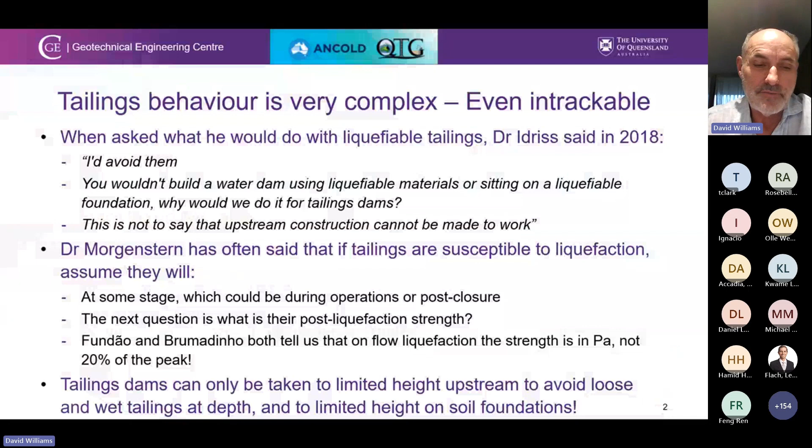Marginal stability of slurry tailings facilities. Tailings dams that fail have marginal stability. Stable dams should not fail. Perhaps 1 in 100 tailings dams have marginal stability, but of course not all of them do. Failures at El Cobre, Mount Polley, Fundão, Cadia and Brumadinho have focused our attention. The ongoing failure rate and severity is unacceptable by anyone's measure.

Let's think about what were the inferred pre-failure factors of safety for these four failures, just discounting El Cobre for a moment. For Mount Polley, it was believed that the factor of safety was 1.43 for a design that included a 2-to-1 downstream buttress slope.

The back-calculated value was about 1.1, because what they actually built was a 1.3-to-1, or angle of repose, slope, and they had, of course, a weak foundation. So it was nowhere near the 1.43 that they thought they might achieve.

Fundão had a peak drained factor of safety of somewhere between 1.6 and 2.0. You won't find that in the expert panel report—there's no mention of it. There was no undrained or post-seismic factor of safety calculated at the time. Of course, it failed, so the factor of safety was actually about 1.

Cadia, the presumed factor of safety, was greater than 1.5. That calculated around about 1.15 for the constructed geometry, and also for the weak foundation that was unknown.

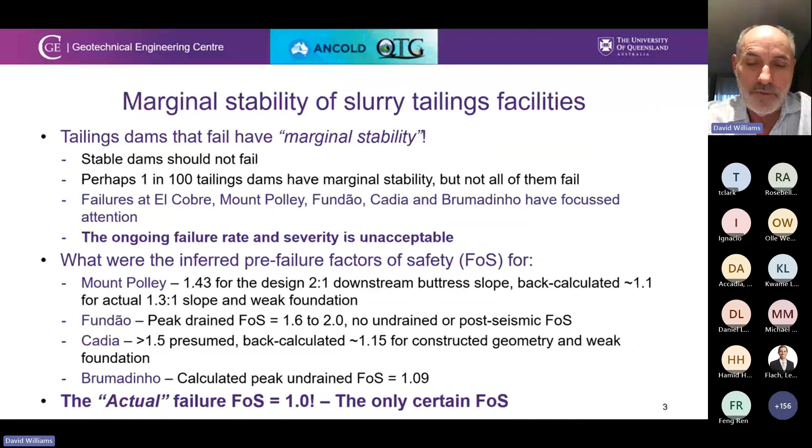Brumadinho, the calculated peak undrained factor of safety, which was required by that time after the Fundão failure, was 1.09. The actual failure factor of safety is 1. This is the only factor of safety we know with certainty—all the others are just calculated.

Let's think also about the setting of the site: the climate, the topography, the seismicity. All of these persist—they're there before the tailings dam, they're there during operations, and they persist post-closure. Think of Australia—I've highlighted in green the things that are favourable in terms of climate, topography, and seismicity, in terms of stable tailings dams. We're semi-arid, we're flat, we have low seismicity. You might say Australia is the ideal climate for a tailings dam to be constructed.

If we look to Brazil, here I've highlighted in red the things that are a little anti-stability. Brazil is generally wet, it's also steep, but it has low seismicity. Steep meaning that you can end up with quite high dams, much higher than you get in Australia.

And then, of course, Chile—arid to semi-arid, that's a positive. Steep terrain, we're in the Andes quite often, and high seismicity. So high seismicity is the key to safe design in Chile, but the fact that it's steep means you end up with high dams. So don't forget about the climate, the topography, the seismicity.

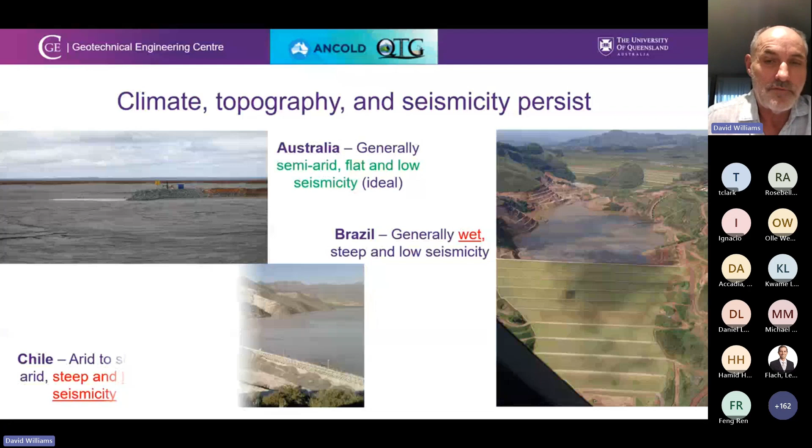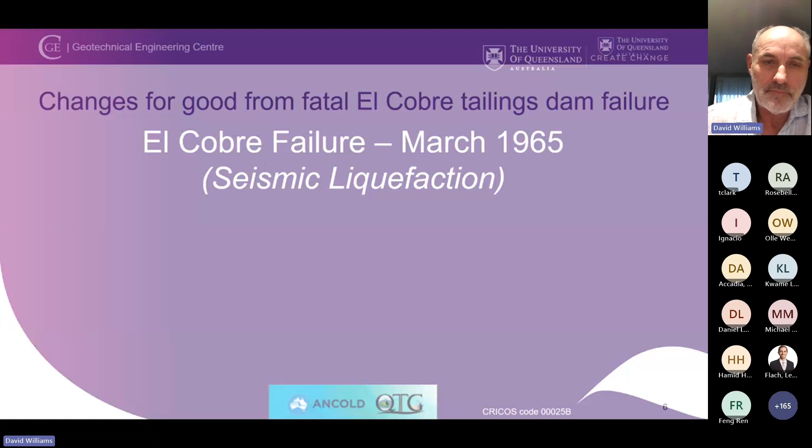Sometimes we do. Let's think of El Cobre, March 1965, a seismic liquefaction failure. There were changes for good that came out of this fatal El Cobre tailings dam failure.

If you look at it before and after, the pre-1965 El Cobre tailings dam—the black is the before, the red is the after. A couple of things you pick up: in the black, you can see there's a setback, a very common way of supposedly increasing stability by stepping back your embankment. Doesn't always actually help. The red is the post-failure shape, and notice the number of scarps—a series of progressive back scarps that go back up through the facility.

The number of fatalities, somewhere between 200 and 350. It wasn't a particularly high dam, but it went through the town of El Cobre. The reason why they don't know the precise number is they didn't know exactly how many people were there, and of course, they didn't have DNA in those days, so they couldn't accurately tell how many body parts they'd actually discovered.

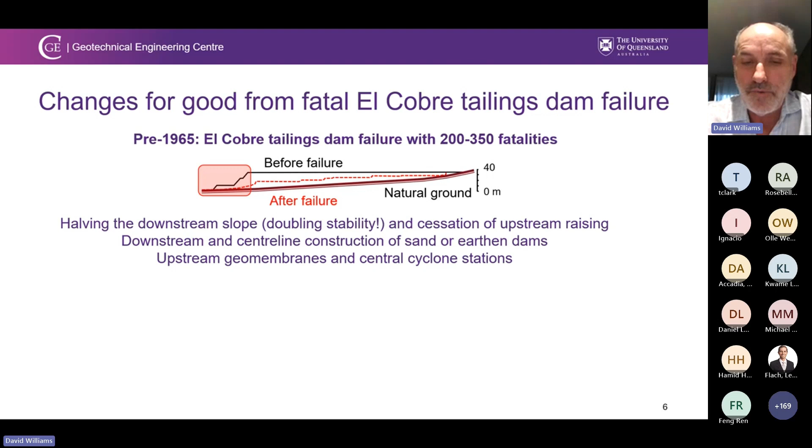The outcome of El Cobre was that the downstream slope was halved, essentially doubling stability, and they ceased upstream raising. Downstream and centerline construction of sand and earth dams persisted. Upstream geomembranes and central cyclone stations were installed. The upstream geomembrane was to try and limit the amount of water that came from the slimes into the sand dam, and the central cyclone stations meant that you had a more uniform supply of sand to build the dam.

And that's what it looked like. I've compared there the red with the green—you can see the enormity of the embankment, the stable trapezoid of support, if you like, post-1965 compared with what was done pre-1965.

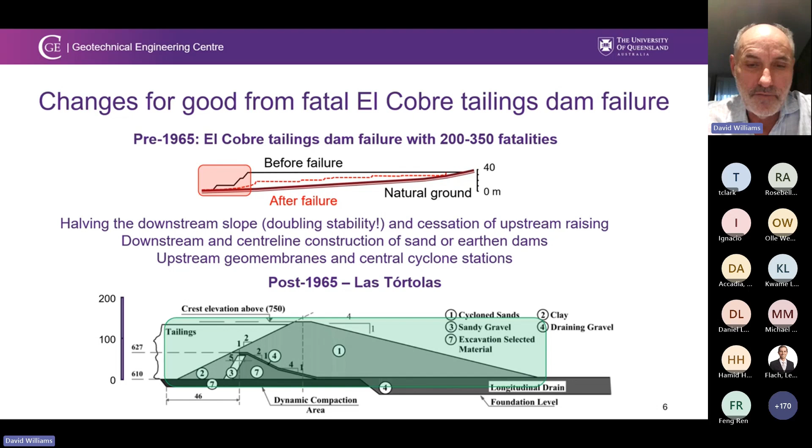It's a good story. If we look at the performance of Chilean sand tailings dams since 1965—this is after Luis Valenzuela—the total number is about 740. Active dams about 100, mostly downstream sand dams built in the way that I just described. Inactive tailings dams about 470, mostly upstream sand dams, and you've got abandoned dams about 170, also mostly upstream sand dams.

Active Chilean downstream sand dams have performed well since 1965 due to the improved construction methods, which were induced not so much by the regulators—it was induced by the industry. The regulations took another 5 years to come into effect. With the exception of a few inactive upstream sand dams in central Chile, most inactive and abandoned upstream sand dams have performed well since 1965, because, of course, they're not being used anymore and they've drained down in the dry Chilean climate.

Let's look at Mount Polley, August 2014, a foundation failure. This is what it looked like. Unfortunately, there was water and slimes against the dam at this location. Perfectly chosen, you might say, Murphy's Law. If there'd not been water and slimes against this part of the embankment that failed, you may not have had the overtopping and erosion of the dam, and the spill of the amount of tailings that came out.

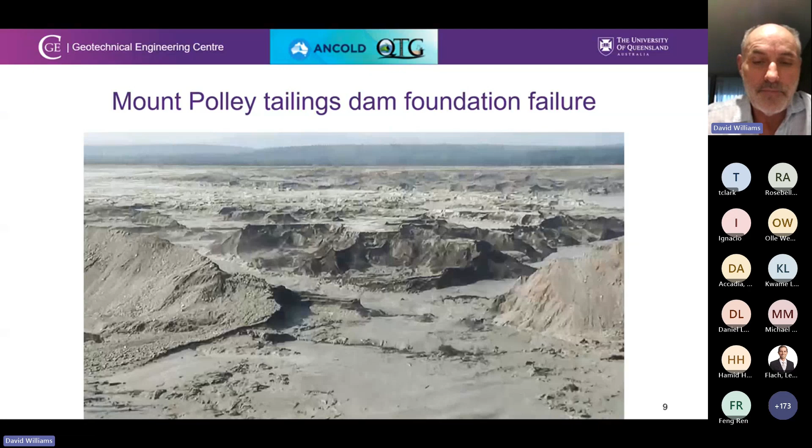Looking at the expert panel investigation and review 2015, they asked a number of questions. What was the technical cause of the failure? Essentially it was this weak foundation layer that was pre-consolidated prior to loading, but was loaded up to the point where it became normally consolidated. That would make it much less stiff, about a factor of 10 less stiff, and hence it would deform much more as the loading was increased.

The failure was triggered by the construction of a downstream rockfill zone at a 1.3 to 1 slope, when it was supposed to be 2:1. It is noted that tailings, water and slimes were against the embankment, as I said, at the location of the failure, leading to overtopping and erosion and the run out of water and tailings.

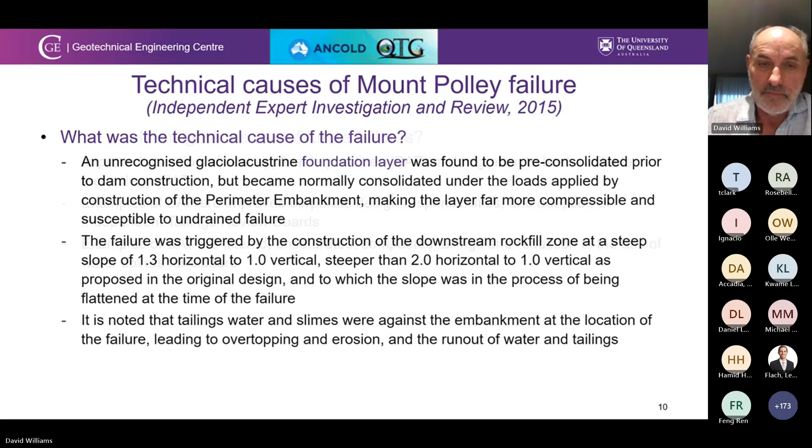They also asked what would mitigate the risk of future failures, specifically for this particular project. They said improved adoption of best applicable practices, BAP, and migration to best available technology, BAT. Examples of BAP are improved corporate design responsibilities and the adoption of independent tailings review boards. Examples of best available technology are filtered, unsaturated, compacted tailings, and reduction in the use of water covers for closure, which are quite a feature of Canada because of their wetter climate.

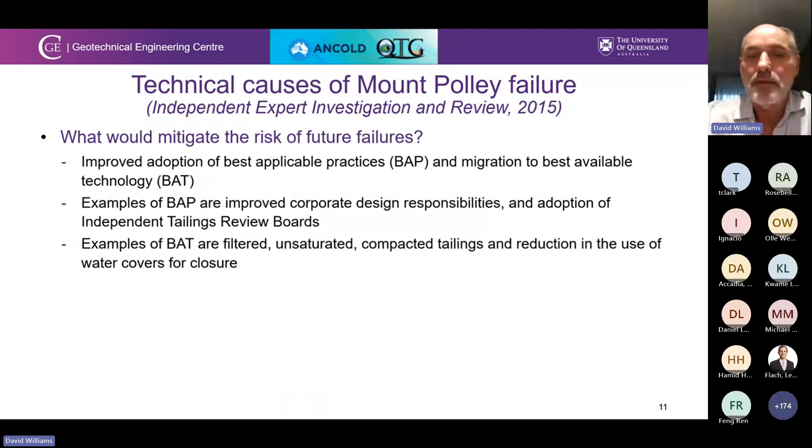Let's turn now to Fundão, November 2015, a flow liquefaction failure. It failed in seconds, it liquefied in seconds, killing 19 people. Fundão is to the right. I don't know if you can see my pointer over here. This is the Germano Dam, much more stable, which was essentially still intact. There were dikes between the two, which fortunately didn't fail, because if they had, the much larger Germano Dam may have spilled through the Fundão failure and created a much worse end result.

This is what it looked like downstream. And this progressed all the way to the coast, with suspended solids travelling about 600 kilometres all the way to the coast on the other side of the country.

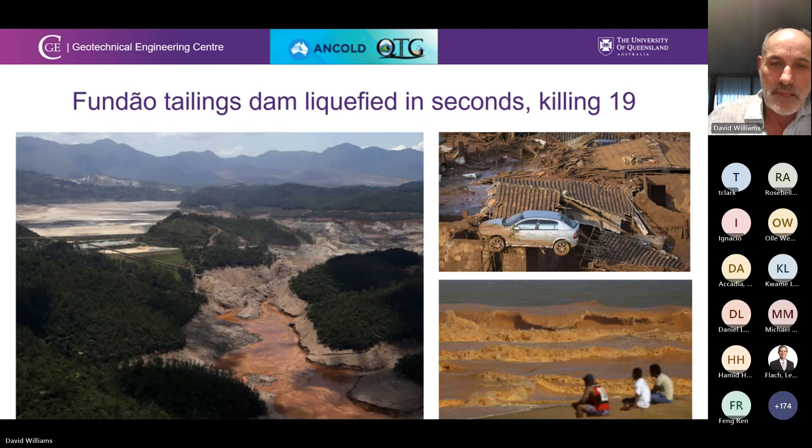Again, turning to the expert panel report in 2016, questions were asked: why did a flow liquefaction failure occur? There are a whole lot of reasons, a whole lot of things wrong with the dam, there's no doubt. Damage to the original starter dam resulted in increased saturation of the tailings, very rapid deposition of slimes, and the slimes were deposited closer to the dam than was intended. Failure of a concrete drain and the setback of the left abutment caused the dam to be raised over slimes, putting the raising further back down the beach. Compression and lateral extrusion of the slimes and loosening of the sand layers above.

Why did the flow liquefaction occur where it did? It occurred at the setback. So setbacks, in many cases, don't actually lead to stability. They may actually make stability less than it would be otherwise, because you're moving down onto slimes or finer grained materials that are softer and wetter.

Why did the flow liquefaction occur when it did? There's a bit of conjecture. If you look at the expert panel report, particularly the last paragraph in the executive summary, you'll get something like this, paraphrased a little. There was a series of 3 small, closely timed earthquakes within about 1 kilometre of the dam, about 30 minutes prior to the failure. They weren't big enough to cause liquefaction in themselves, but being closely spaced they would have some sort of cumulative effect.

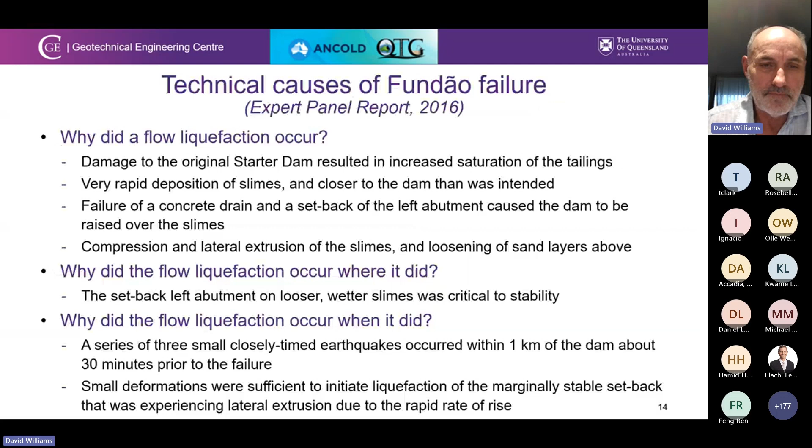So one of the resulting changes to tailings dam design in Brazil's wet climate arising out of Fundão: if you look at prior to Fundão, Brazilian law required only drained geotechnical stability. They actually call it effective stress analysis. It's a very short paragraph in the law. It's not a how-to guide. It just tells you, you must do this.

The drained internal friction angle can generally be relied upon and only varies by a small amount, possibly plus or minus 3 degrees, provided it doesn't go to residual strength. Drained geotechnical stability is generally not critical. Undrained or seismic geotech stability likely governs, as was the case for Fundão.

So arising out of Fundão, by 2017 the Brazilian law was changed, and it now requires undrained, drained, and post-seismic analyses. But it raises some questions: what are reliable and representative peak and post-seismic undrained strengths? In Brazil, they weren't used to coming up with these, and they've struggled.

Undrained strengths also vary more widely than drained strengths, implying less certainty about the calculated factor of safety. So if your undrained strength varies by, say, plus or minus 30%, depending on which consultant you ask, your factor of safety will also vary by that amount.

In the Latin-speaking world, as opposed to the English-speaking world, simplistic pseudostatic stability is analysed. If any factor of safety values are less than required, I would say, and most people would say, do a deformation analysis to check freeboard and how much movement you might get.

Turning now to Cadia, March 2018. Again, a foundation failure. Prior to the failure, there was a pond at the toe where the slump location occurred. Well prior to the failure, there was only the northern tailings storage facility—the southern one, in the bottom half of this picture, had not been built at that stage—but there was a pond, a low point right against the toe where the failure subsequently occurred.

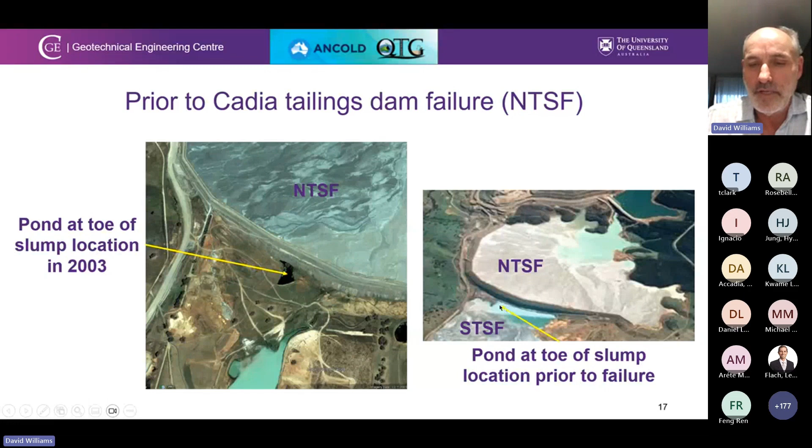Now the pond—there was a pond there from natural sources. There was also a pond from the tailings that came from the Southern Tailings Storage Facility, right in the same location, at the maximum height of the Northern Tailings Storage Facility.

Again, turning to the expert report, technical causes of the Cadia failure: why did the event occur? It's interesting they called the failure an event rather than a failure. Deformation in the foundation during construction of the upstream stage 10 and the upper buttress, and excavation at the toe, led to the removal of embankment support at the toe and later liquefaction of the loose saturated tailings behind the embankment. So liquefaction was a secondary event, about a day later.

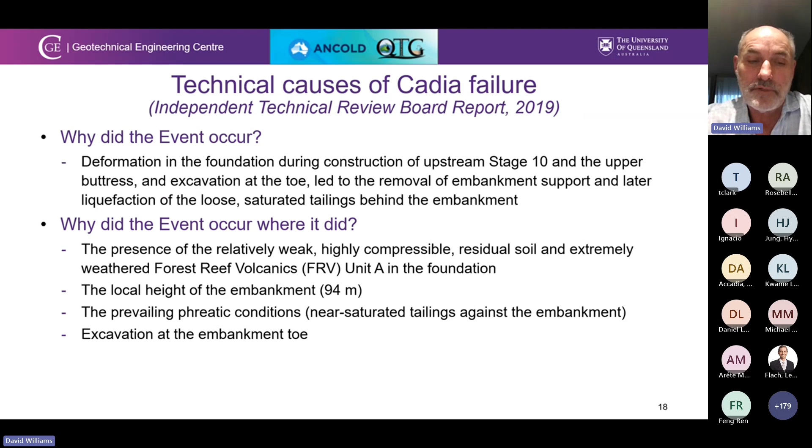Why did the event occur when and where it did? Again, there was a weak, highly compressible layer that was previously unknown. The local height of the embankment at that point was 94 metres. The prevailing phreatic conditions, near-saturated tailings against the embankment, also contributed, and there was excavation at the embankment toe.

Why did the event occur when it did? Timing was controlled by deformations accumulated through the construction history. So essentially it was a construction-driven failure, sufficient to trigger foundation failure and later flow liquefaction in the loose, near-saturated tailings stored in the Northern Tailings Storage Facility. There was a small earthquake, or a series of small earthquakes, prior to the event, but they were ruled to have no effect on the failure.

They also asked the question, why won't a similar event occur? A similar failure can be avoided by adequate analysis of the foundation conditions—well, investigation first, then analysis—and appropriate instrumentation to demonstrate that the foundation is behaving as intended.

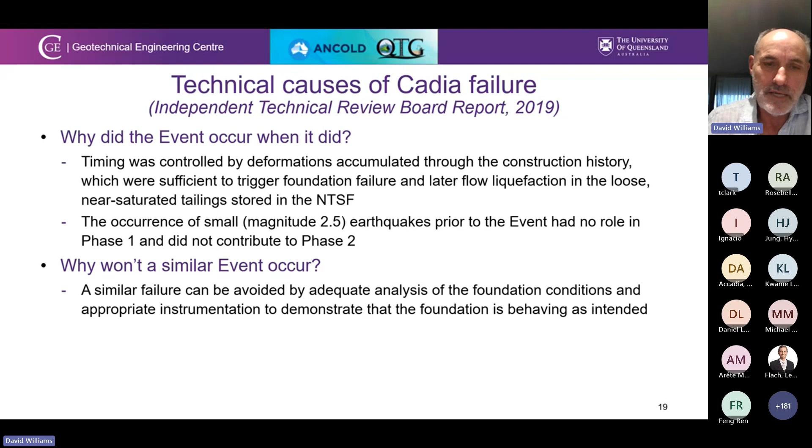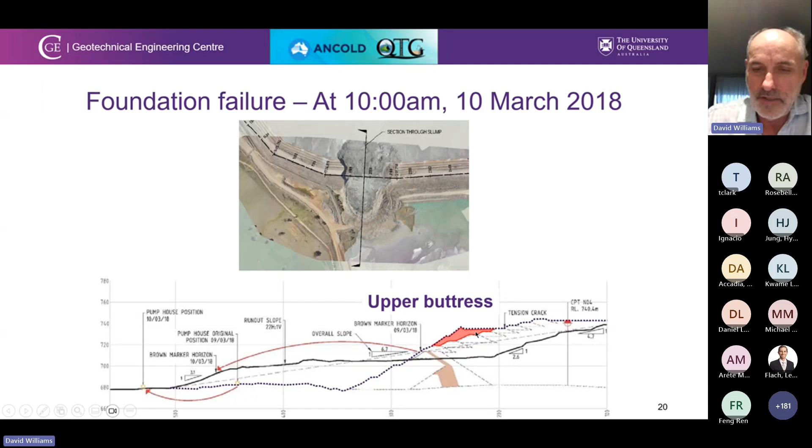Now, looking at the failure, it was a relatively small-sized failure. You can see an aerial view of it there. And then in the lower diagram you can see the location of—well, first of all, stage 10 was back here. There was a tension crack that developed here. The so-called upper buttress was placed here.

Just giving a bit more detail of that, you can see stage 10 up in the top right-hand corner. It was constructed, then the upper buttress. The intention was to add the two downstream buttresses, the toe and this face buttress as well, but they weren't done at the time, and there was excavation at the toe instead.

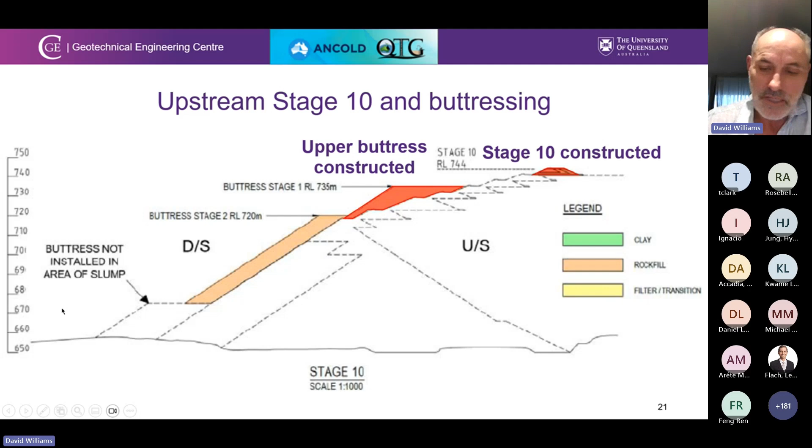So you've now got loading at the crest and unloading at the base. Most people would realize that was a bit of a recipe for disaster. And because it was known by that point, I guess, that they'd found weak foundation conditions.

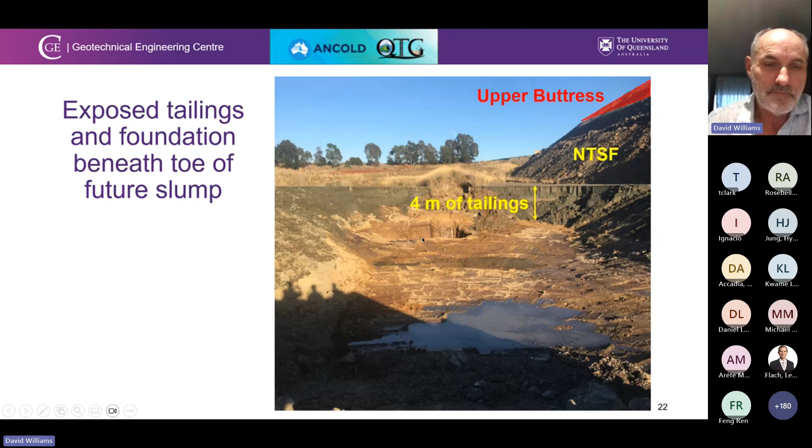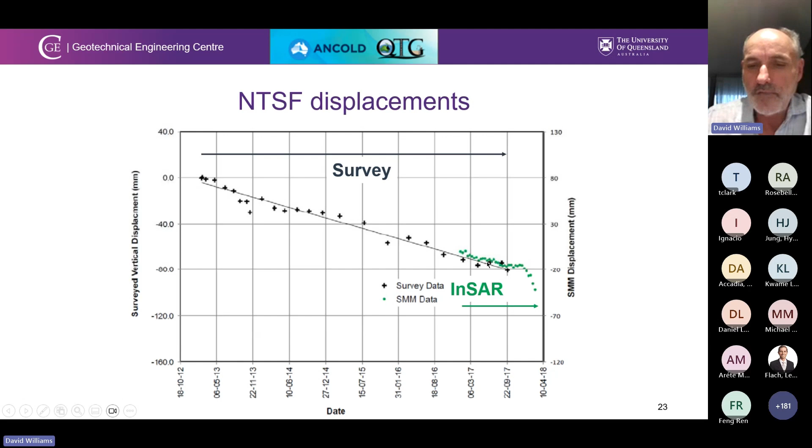It wasn't known prior to the excavation. Some useful information came from satellite INSAR. There was displacement monitoring just from prisms. If you look at the crosses, you can see that they're anywhere up to about 5 months apart, so certainly not particularly frequent, but that was fairly common at the time. So that's survey. And then INSAR, which was calculated after the event using satellite imagery, is the green dots, and the failure occurred about there.

So you can see that this was compared with a flow liquefaction failure, this was a relatively slowly developing failure, because, of course, INSAR only gives you a point every 5 days or so if you've got ascending and descending, or even more infrequently, about 11 days if you've got only descending from north to south.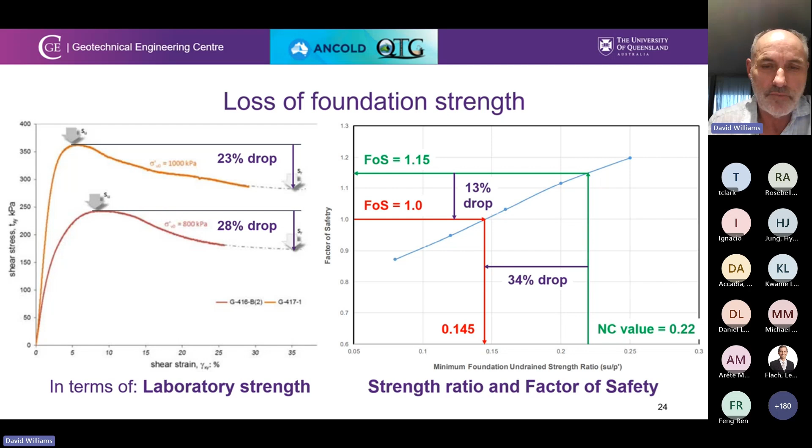So that's a 34% drop. If you do it in terms of factor of safety, it's a 13% drop. You can see there's quite a considerable drop just based on those two simple analyses of laboratory strength and strength ratio versus factor of safety. Gives you a bit of a feel for when the deformation exceeds a certain point, how much drop in strength, drop in stability you might get.

Now turning to Brumadinho, January 2019. Another flow liquefaction. So we've got two foundation failures, Mount Polley and Cadia. We've got two flow liquefaction failures, both in Brazil. That is Fundão and Brumadinho.

Most people by now will have seen the little video clip, and this is just a shot taken some seconds after this tailings dam liquefied, killing 270 people. We can be much more precise about the number because we had the advantage of DNA testing. You don't find whole bodies. Unfortunately, you find body parts, and you need DNA to identify them. The dam was about 80 meters high. The wave that came out was at least 30 meters high.

Again, turning to the expert panel report, Dam 1 was marginally stable, basically too steep, too wet. A sudden strength loss and resulting failure of this marginally stable dam was due to a critical combination of ongoing internal strains, or creep, and a strength reduction due to the loss of suction in the unsaturated zone as it wet up with rainfall. The rainfall we're talking about was not the highest on record, but the preceding 6 years up to this point, the rainfall was progressively increasing each year.

So this particular year was quite a high rainfall event. It wasn't the wettest, but it was quite high, much higher than previous years. The calculated pre-failure strains from this combination of triggers match well the small deformations of Dam 1 in the year prior to the failure. Of course, it took off and failed very dramatically when it did fail.

It's also interesting that limit equilibrium analyses assume all points on the slip surface to be at the same state. This is not necessarily true for a marginally stable dam. It's clearly not true in this case, where different parts of the tailings mass are at different states on the stress strain plot.

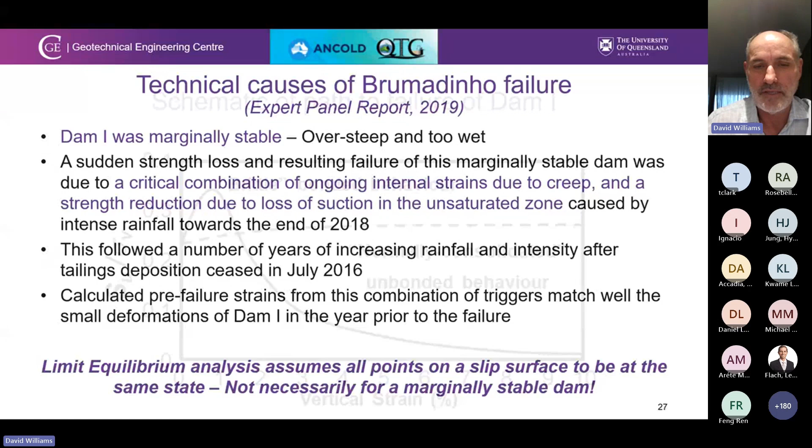Some are pre-peak, some are at peak, some are post-peak, and the drop-off in strength after peak is very dramatic in this particular case. So a schematic of the path to failure of Dam 1 looks something like this: undrained strength ratio versus vertical strain.

The tailings material had a very brittle behavior. At about 1% strain, they collapsed. Normally consolidated would be more like the dotted line.

So essentially you had this combination of strength reduction due to loss of suction in the unsaturated zone, where most of the rainfall infiltration was taken up and didn't get through to the water table, and ongoing creep under constant load. This was constant load because the dam had ceased tailings deposition.

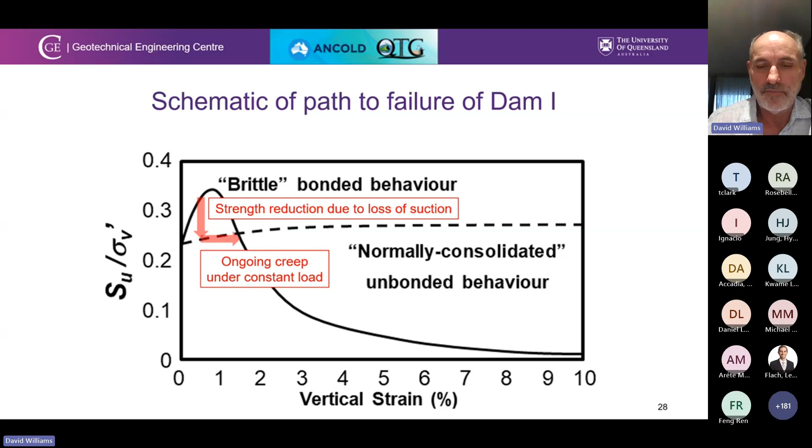And I could put those two vectors anywhere. I could have put them down here and had loss of strength and creep. It would have had the same sort of effect, a reduction in strength, leading to that sudden flow liquefaction failure.

So that led to the global industry standard on tailings management. Its aspirational goal is zero harm to people and the environment. And of course, we must realize that zero harm is impossible, so it's an aspirational goal.

The design intent is to have extreme consequence classification and a 1 in 10,000 year return period for both flood and earthquake loadings. That design intent matches exactly what we have under ANCOLD and CDA, but for closure. So essentially it's trying to bring that requirement to the operational phase.

The trouble is the current operational practice is typically maybe 1 in 100 or 1 in 1,000 year return periods, not 1 in 10,000 years.

So the implications are that we should really design for the probable maximum flood. We should design for the maximum credible earthquake, and it doesn't matter where you are in the world, that's likely to be sufficient to liquefy susceptible materials.

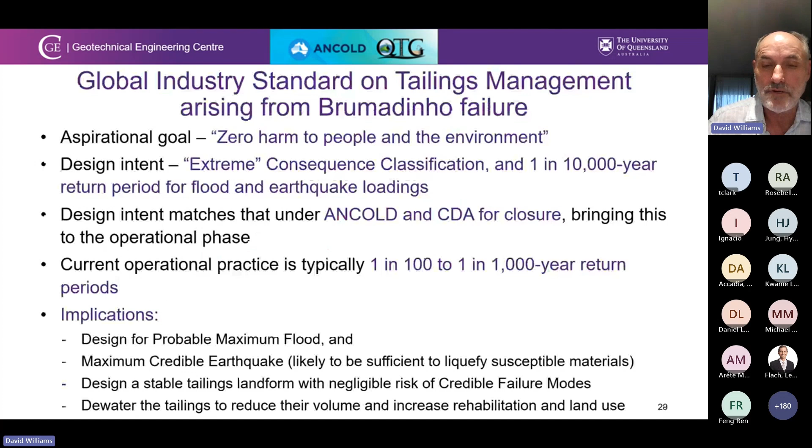So how has the industry responded? The late Andy Robertson, in 2018 in Brisbane, said that in the wake of recent tailings dam failures, improved management resilience—that is, governance—is leading over improved engineering resilience. If we had the latter, we'd actually be reducing the liability.

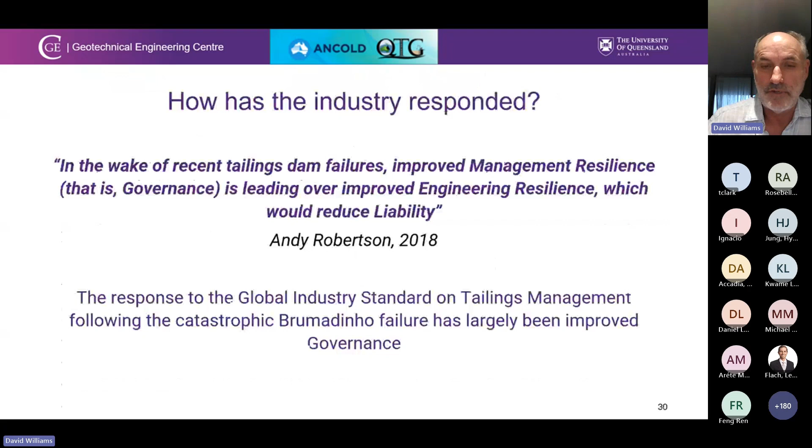So governance alone can't do that. And then further, the response to the global industry standard on tailings management, following the catastrophic Brumadinho failure, has largely been improved governance. How much have we actually changed the way we manage tailings?

I think the plot by Silva is a very pertinent one because it highlights the disconnect between factor of safety and probability of failure. So if you choose a factor of safety of 1.5, but you have poor design and construction, you've got a 1 in 10 chance of failure on an annual basis. In other words, out of 10 dams, 1 will fail.

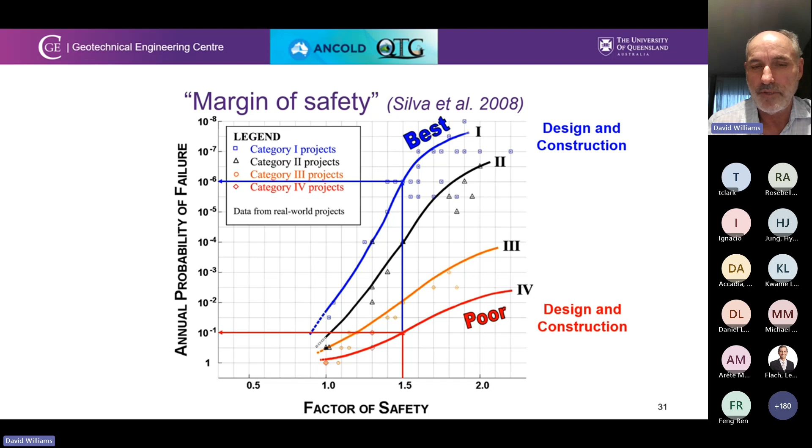Clearly, we're not there because we don't get that failure rate. We can adopt the same factor of safety, but have best practice design and construction, and reduce that probability to 1 in a million. Clearly, that's where we need to be.

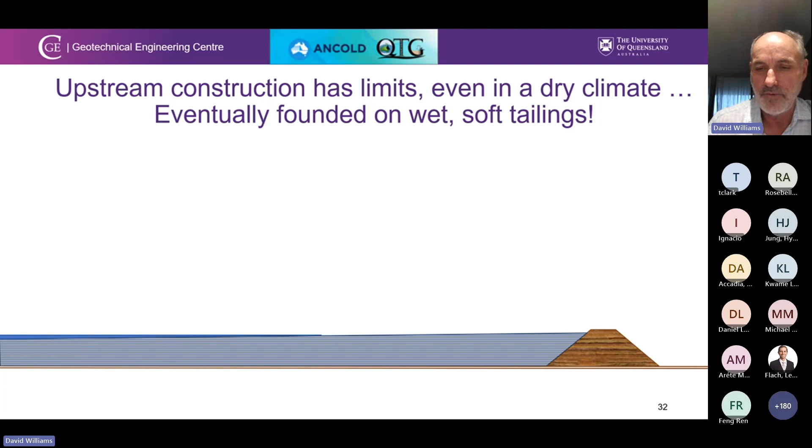If we look at upstream construction, it has limits even in a dry climate, because eventually you'll be founding on wet, soft tailings. If we look at this cartoon, there's a starter dam. We put in tailings behind it, we have a pond, we raise it upstream, tailings in a pond, and so on.

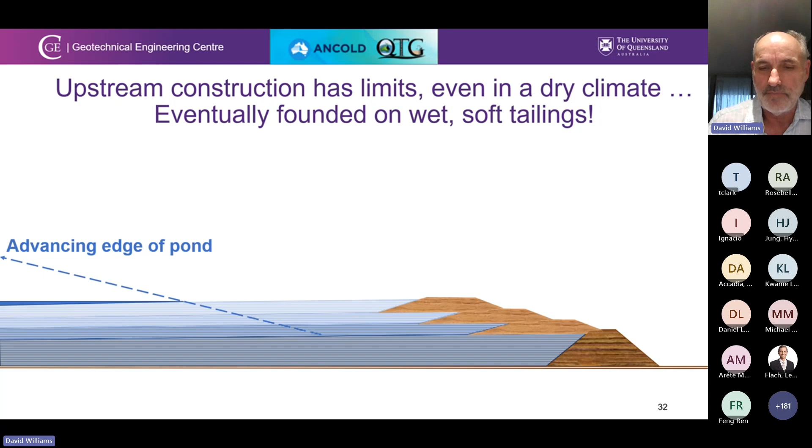So what we have is an advancing edge of the pond. But if we keep going, then it's clear that that advancing downstream crest is going to be at some stage sitting on top of a former pond. In other words, wet and soft tailings.

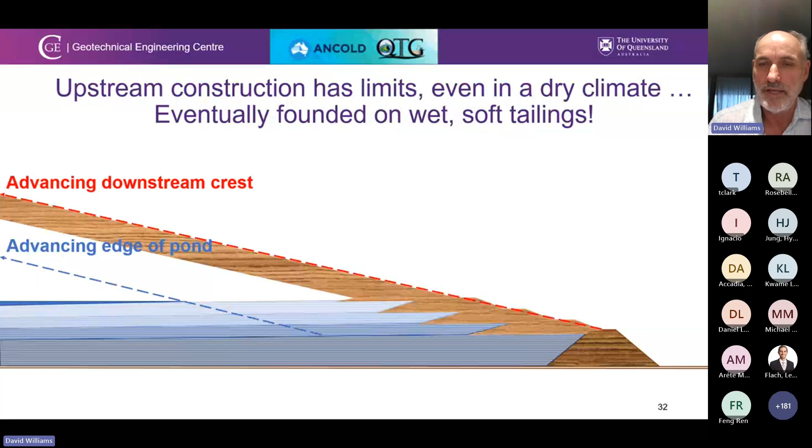What about construction on weak foundation layers? It has limits as well. As the height of the tailings dam is progressively raised, the pre-consolidation pressure—the highest historical stress of foundation layers, we're talking about soil layers—may eventually be exceeded.

So the foundation layer then reverts from over-consolidated to normally consolidated. Its stiffness is about a factor of 10 lower, and you're going to get much more, 10 times the deformation for an increase in load. And such deformations can threaten freeboard, potentially leading to overtopping and failure.

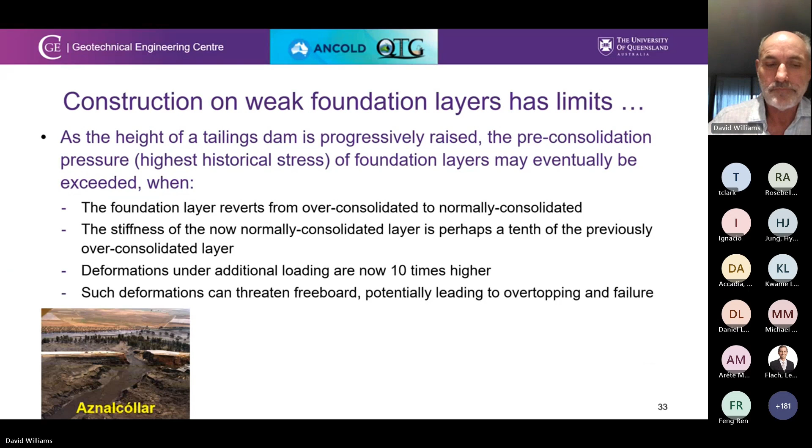Examples: Aznalcóllar, Mount Polley, and Cadia.

There's some sort of evolution of tailings dam construction. We started with a trapezoidal downstream tailings dam, raised by a series of raises downstream. We moved to upstream construction.

But we're essentially relying substantially on a tailing zone. What we've really created is something like a skin on the upstream face, but the tailings behind have to provide support.

Now, in regions where upstream construction is being banned or it's unachievable, we want to go back to a conventional tailings dam. We need a trapezoidal downstream tailings dam, or at least maybe a centerline dam you could get away with as well. And then there's a lot of talk about moving towards a filtered tailing stack.

We have to stop calling it a dry stack because it's not. It's filtered tailings that to some extent are being compacted as well. And if we have a structural compacted zone, we're still relying on a substantial non-structural zone. If you compare the top right-hand corner with the bottom left-hand corner, it looks somewhat similar.

So in regions where upstream construction has been banned, you wonder how long it's going to take before we ban this sort of filtered tailing stack.

You could also consider in-pit disposal where appropriate and suitable, but preferably dewatering the tailings to maximise the storage capacity and to facilitate rehabilitation. How would we make a filtered tailing stack more stable?

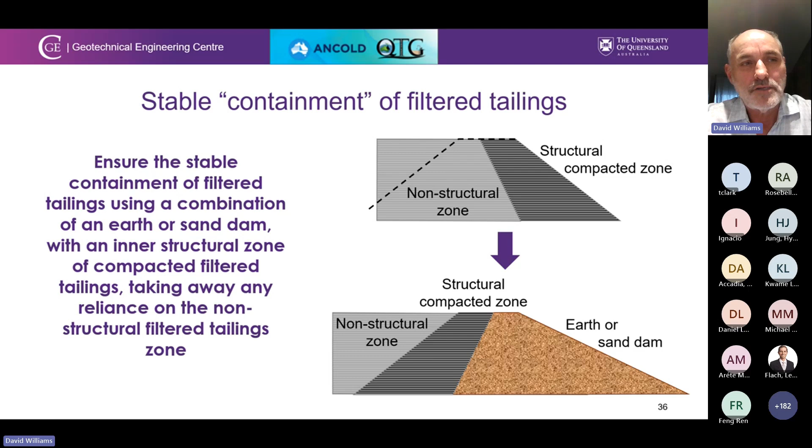So going from the top to the bottom. Now, in fact, in Brazil now, they're required by law where they use filtered tailings to compact the entire stack, not just an outer zone.

Let's think about what a tailings facility might look like. Typically in Australian conditions, you have a starter dam, you go to a downstream raise, then you decide, oh, there's too much fill involved in going downstream again, so we'll go upstream.

Now we're worried about upstream failure, so we put in a bit of a berm, which is not a very efficient way of stopping upstream failure. We go one more with a bigger berm and a longer berm. But how do we make that close?

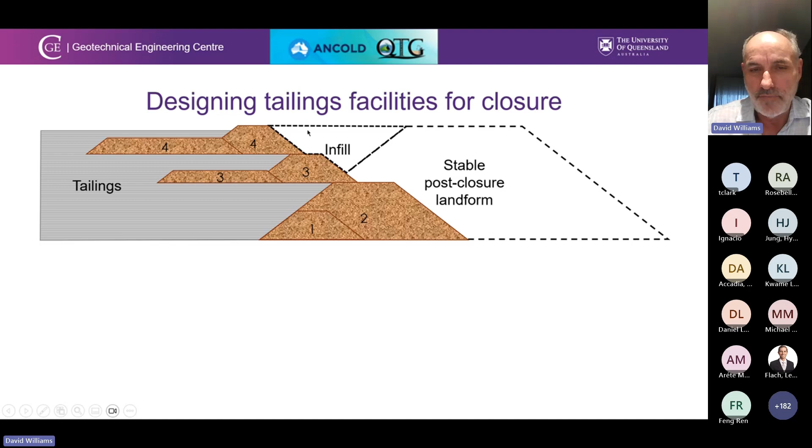Well, to close, we need a stable post-closure landform. If we built that, we'd then have a zone here to infill. And the total amount of fill we'd have used to create this stable post-closure landform is now more than if we just did this in the first place.

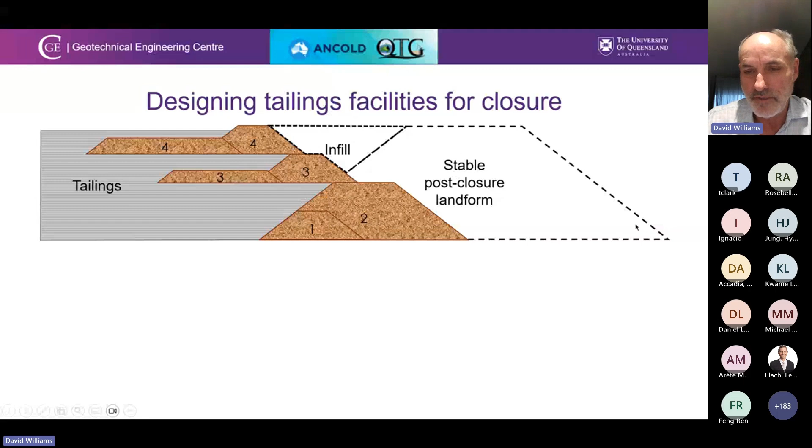Just build a stable trapezoid in the first place. Something like this.

So some key takeaways. Tailings dams that fail are marginally stable, and there is typically a combination of causes, and obviously water is the key element. If the tailings were dry, you wouldn't have a stability problem.

Fatal tailings dam failures can bring real change. El Cobre revolutionized tailings dam construction in Chile's highly seismic setting and also spread to Peru.

Brumadinho led to the GISTM with the ambition of zero harm from tailings facilities, affording operators flexibility as to how best to achieve this goal. However, the GISTM has led primarily to a focus on governance rather than changing tailings management.

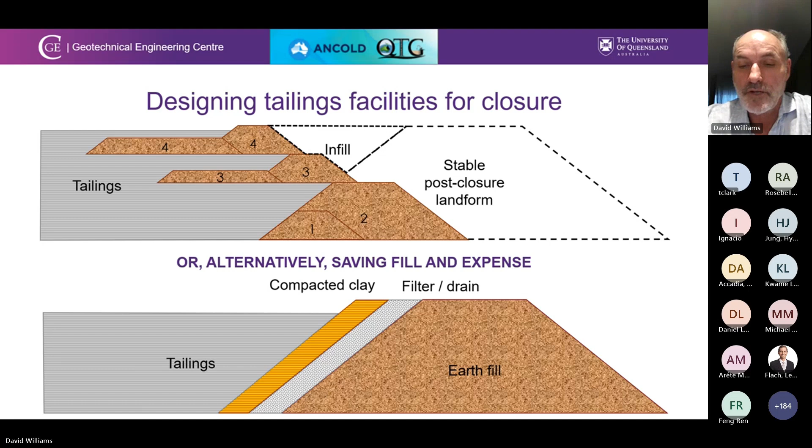Alternatives include compacted filtered tailings and integrated waste rock dumps, tailings facilities. Separate tailings containment from storage, and then have optimal storage. Separate tailings containment and optimal storage. Will we improve tailings management sufficiently to recover confidence and trust? Over to questions.

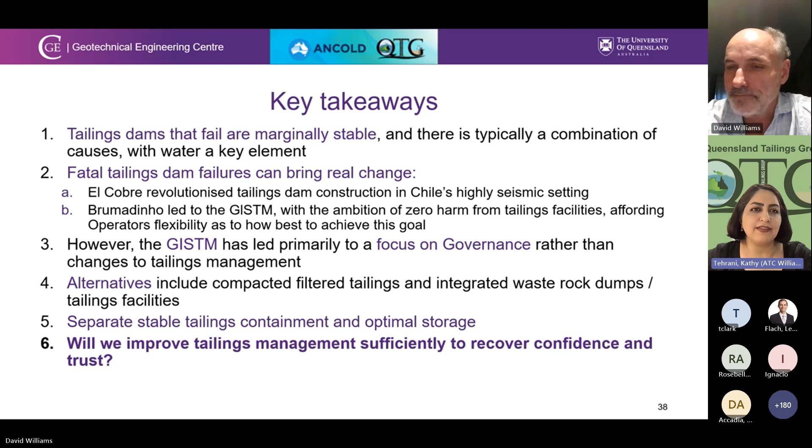At what stage would you move from limit equilibrium modeling to deformation modeling? Is limit equilibrium on its own sufficient if you are achieving certain factors of safety, like 1.5 for peak and 1.1 for residual shear strengths?

Yeah, I think it's unfortunate that we've become so fixated with the factor of safety approach. It's a simplistic approach which is poorly understood - what does it really mean? It has the attractive word 'safety' in it. Probability of failure has the unattractive word 'failure' in it. But it doesn't matter what the factor of safety is, every structure has a probability of failure, even though it may be very small. It doesn't go away just because the factor of safety is above a certain level. So I think we should be using the factor of safety calculation, which is rather simplistic when you boil it down, as a screening test.

ANCOLD, CDA and other regulations around the world are all saying that ideally you have a factor of safety in excess of 1.5 for the peak condition. There's a bit of disagreement about the seismic value - in ANCOLD it's between 1.0 and 1.2, which is quite a range. We don't give a range for peak, so why do we give a range for seismic? There's a rider that allows you to make a judgment on whether your data are good or bad. In CDA, it's more like 1.1 to 1.3, still a range. Some mining companies have adopted 1.3. I think we should have a little more uniformity on that.

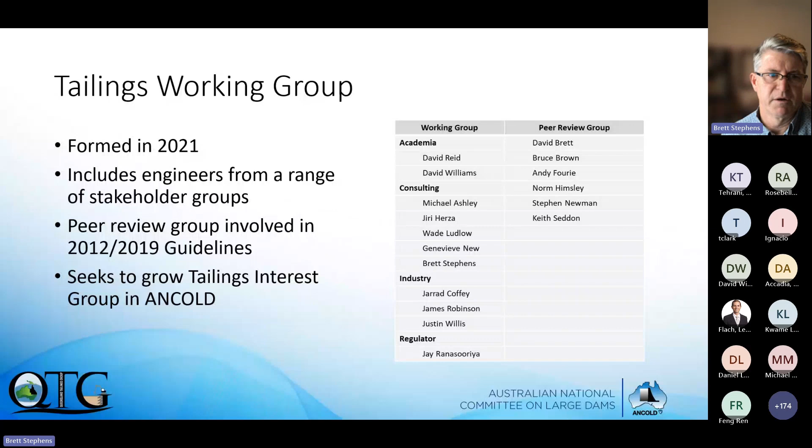A bit of a shout out to the Tailings Working Group — that's the group involved. That includes David, as well as a suite of other people from academia, consulting, industry, and regulators. We're fortunate to have a very distinguished peer review group who were responsible for writing the last tranche of the guidelines, which have been very well received and used by industry.

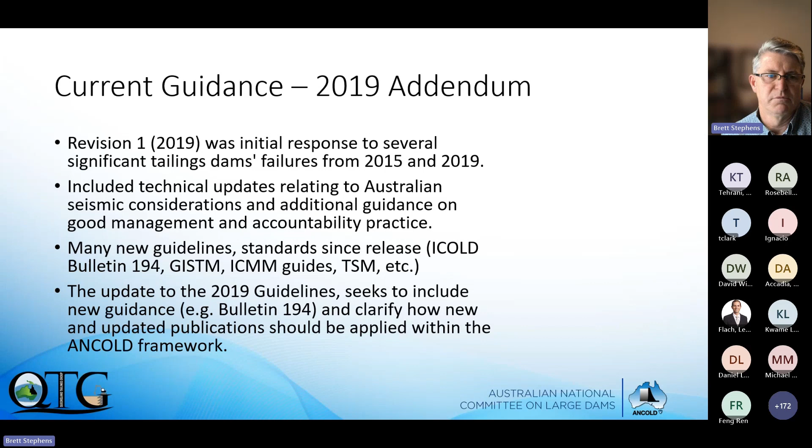Just a bit of a brief outline on the guidance. The last update to the ANCOLD Tailings Guidance was in 2019, and it was really an initial response to the dam failures that David discussed, including a technical update on Australian seismicity. Since then, there's been a suite of new guidance and standards released — ICOLD Bulletin 194 is out in draft on tailings management, awaiting printing. We've also got GISTM, a governance guideline, and the ICMM guides, TSM, among others. So our update wants to include all this new guidance and clarify how all these new publications would be applied within the ANCOLD framework.

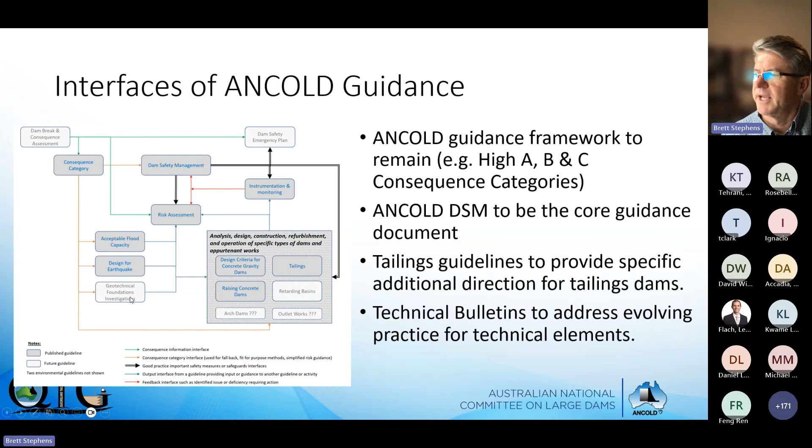We've been asked a bunch of times as a group, are we adopting the GISTM guidance? Are we changing the way we do consequence categories? And the answer is basically no, because we're anchoring to the ANCOLD guidance and the work that the consequence categories are based on. So we're not going to be changing consequence categories to align with GISTM. That doesn't make sense for us.

We're wanting to link into those guidance, but using the updated and current guidance of ANCOLD doesn't conflict with GISTM, and I think the industry is used to dealing with that. We have our ANCOLD consequence category, and then we obviously have the GISTM consequence categories. I think the dual reporting of that is not confusing anyone at the moment - it's been understood by people who are applying GISTM guidance.

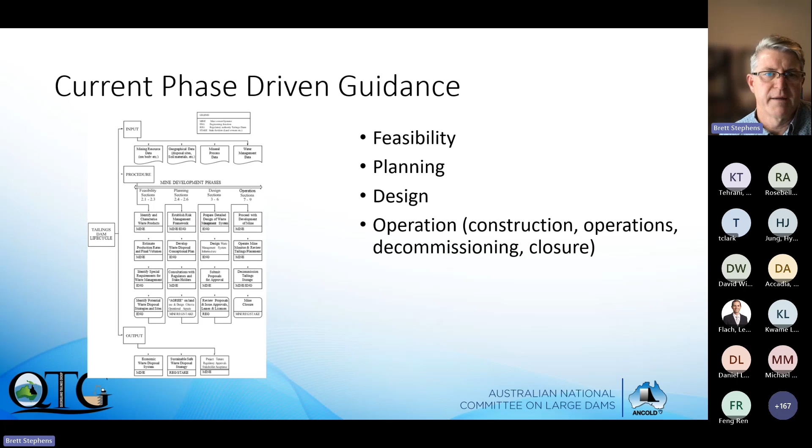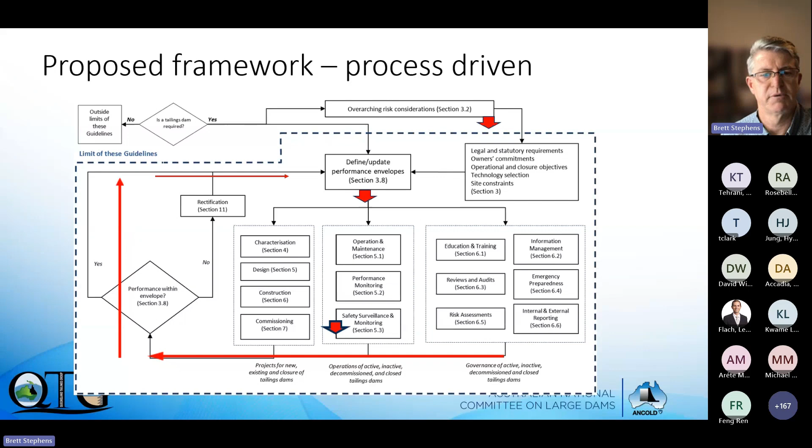So I can take some questions on that, because I expect we'll get some based on the feedback we had from the WA Tailings Group two weeks ago.

So I heard the question to David, and you'll probably get it to me again. In these guidelines, we're really talking to the term tailings dam referring to a constructed structure or embankment to contain tailings. So we're really looking at what those dam structures are, and we're not specifically going to provide detailed guidance on things like in-pit storage, filter stacks, and integrated tailings and mine waste dumps. So our intent and our thoughts are at the moment that we'll provide some commentary in the back of the guidance on how some of the guidance for tailings dams may be applied in certain situations for things like filter stacks and integrated tailings and mine waste dumps.

But they're not going to be exhaustive, and they're going to be guidance only, and we'll be trying to direct people to make their own judgments based on the standards, because these standards are really not applicable for in-pit storages directly. You're going to need to use engineering judgment, and they're probably going to be out of scope for most of the things.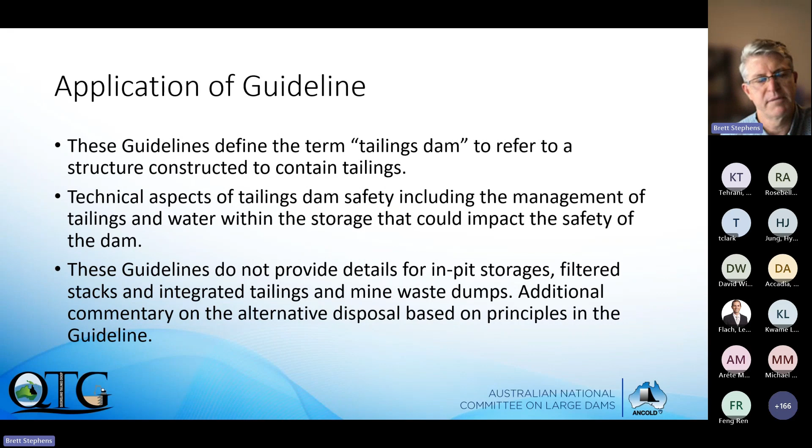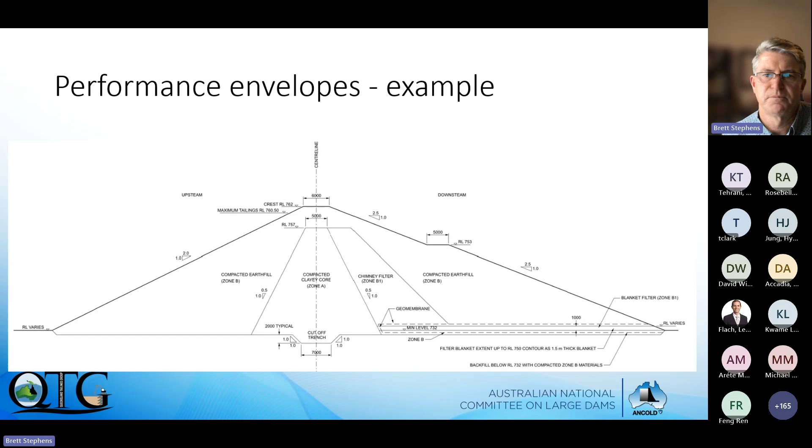So as an example, and apologies to people in WA who saw this before, but we're just repeating it. It's our post-construction. We've got a dam. We expect post-construction settlement of this dam to be 600 millimeters. So the design includes a camber to compensate for the settlement of the foundation. So that's our expected performance. So the storage and the flood handling of this dam is based on this expected performance of 600 mils, and our freeboard's being built into it there, along with the storage of the tailings. So all of that forms our expected performance envelope.

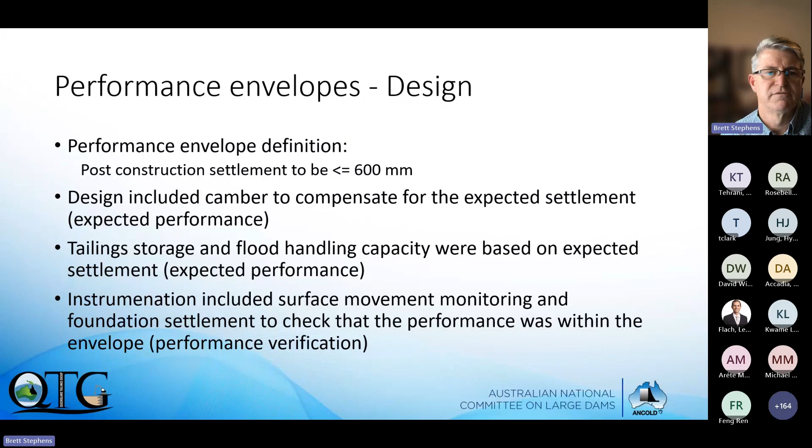We've put instrumentation on the surface to monitor this as part of checking and doing that. And that's what we've done as part of the performance verification. So there we have, here's our performance envelope. We've defined our performance, and we have our characterization, our design, and our construction for doing the verification. So not very complicated. We do this all the time. It's just a different way of saying it.

So as with all things with tailings, we plan, do, check, act. So we've built this thing, and we've now gone and looked at our instrumentation. The dam settled more than 600 mils. So we've gone back and checked it all. And what we find out is this additional settlement now compromises our flood handling capacity. Our freeboard's no longer what we had in our design envelope. So what do we do?

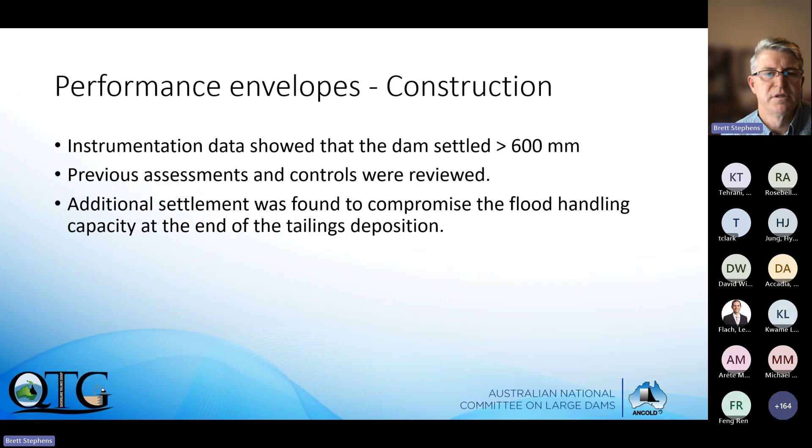So now we've got our performance monitoring, we have our surveillance and monitoring. Is it within our envelope? Clearly it's not. So we now go to what we call rectification. So we're going to have to repair the dam. Now that doesn't mean we're going to repair the dam every time. What we want to be doing is going back and looking at the crest. So potential options for this dam, because it's a very simple example, let's just change the dam. Let's build the crest up for the differential between it.

So we've got 800 mils of settlement. We had 600. So can we top this up 200 millimeters, or can we change the performance envelope and reduce the tailing storage? Right, these are all of the options that are always available to us as designers, and it's pretty simple, as you can see.

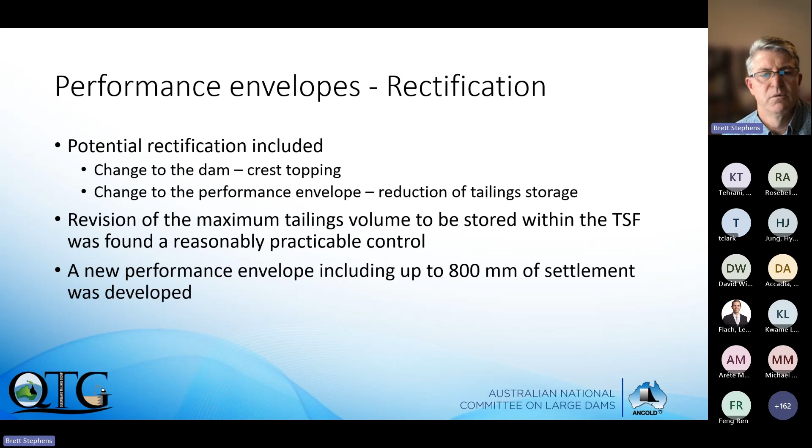So really, what we said is that we can revise the tailings to be stored in it. We think that was the answer we suggested out of the two, because we can't get out there due to piping and discharge and the thickness of the thing. So the new performance envelope's 800 mils of settlement, and what we've done is we've reduced ostensibly the volume of tailings stored by 200 mils. So therefore, we've done this rectification.

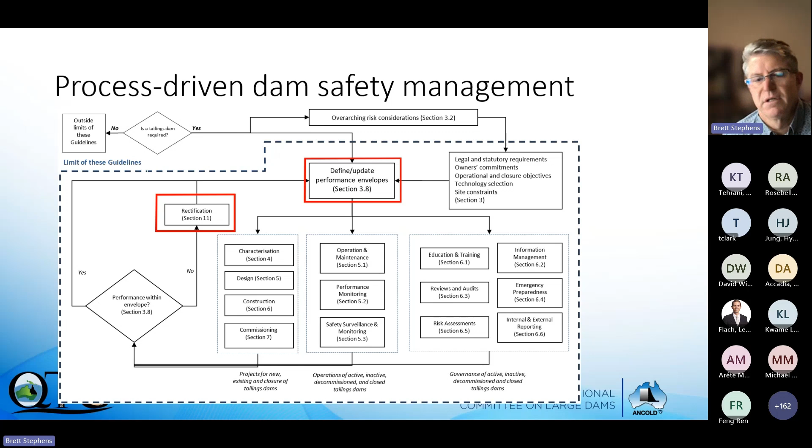We've changed this performance envelope, and then we go back into this cycle to check, right? So this is really nothing new. It's just some different terminology, and that's where we work.

So now our performance envelope is now 800 mils, 200 mils higher than it was. We didn't do the raise. We've got the same freeboard because we've reduced the tailing storage, and then we're looking to increase monitoring because basically this additional settlement wasn't foreseen. So do we have unfavorable cracking? Review the instrumentation in light of that, and then check the changes don't influence other performance envelope criteria, right?

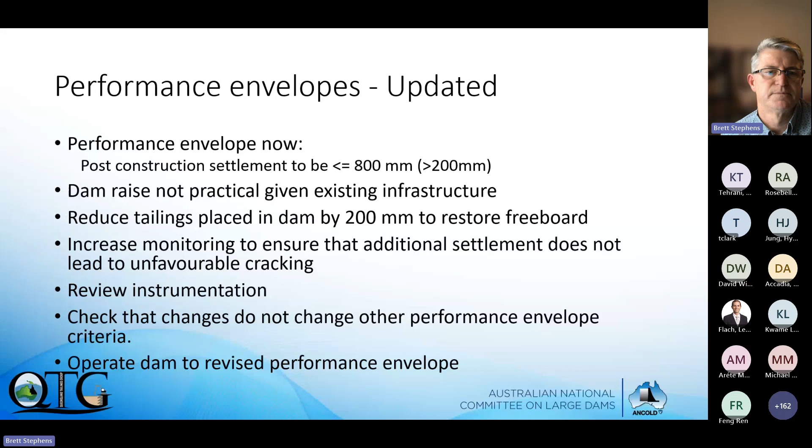I'll take some questions at the end on that one. I'm sure there's probably a lot.

We'll talk about the flood management guidance, because this is one of the elements that's going to go out in a white paper very soon from our working group, Michael Ashley, Jay Rana Saraya, and Ryan Singh, to inform the guideline. So we'll just go back to what we did.

About 2 years ago, there was some industry feedback and questions that were given out to the groups as part of the review on flood management and water management. And some of the feedback we got was there's a misalignment, or a perceived misalignment, between the guideline and other ANCOLD guidelines, and really the dam failure consequence category for tailings dams versus sunny day, and the flood failure consequence category, and the AEPs in the guidelines versus the tailings guidelines were not aligned, and seemed to cause some confusion in industry.

So there was some unclear guidance on some items, and the design flow chart in Figure 5 of the current guidance was pointed out as confusing, and some issues on spillway requirements.

So what we also have is some inconsistent terminology between the tailings and other ANCOLD guidelines, just basically as these things have evolved. And what we're wanting to do is align everything back, so all of our guidance refers back to the core ANCOLD guidance as a starting point, and then, unless told otherwise, you design to those guidance. If we need to change it, we'll put it in the tailings guidance.

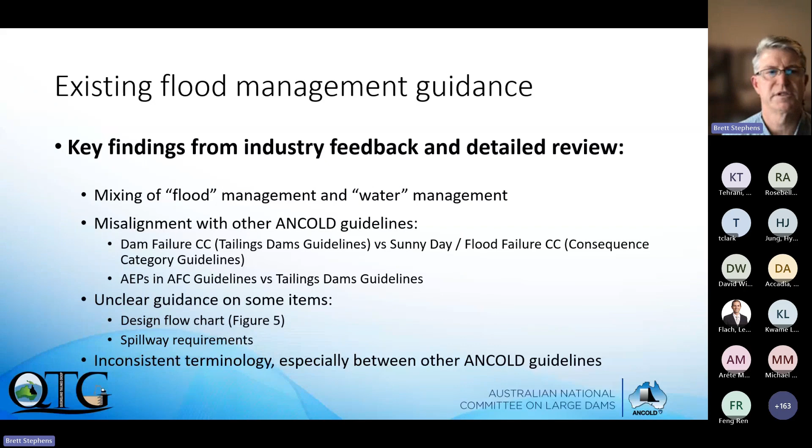So the proposed updates that are going to come out of our flood management guidance in the white paper that you should see soon is that the TSF owner is responsible and accountable for managing the flood impacts on the TSFs, right? ANCOLD provides the guidance, but it's not going to be a prescriptive approach, and that's typical of all ANCOLD guidance, using risk-based assessments and engineering judgment.

We want to clarify the difference between the flood management and the operational water management and clearly distinguish the two in different chapters. So we're going to actually write a chapter on flood management and a chapter on operational water management so that they're clearly separable, and make sure that the definitions and terminology for each of the consequence categories are clear.

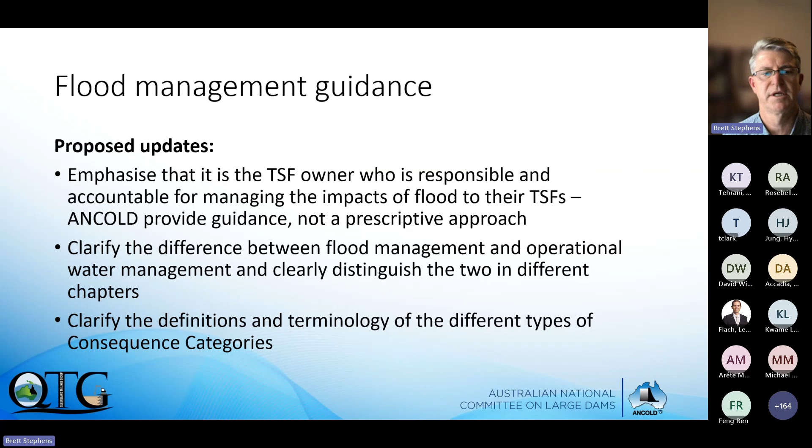Our current thought is we're going to remove references to environmental consequence category, right? And the reason for this is that the environmental spill consequence category is really part of the performance envelope, and that's something that's usually mandated as part of the licensing, and that forms an input into the performance envelopes. It doesn't really change the consequence category of the facility and what we need to design it to.

So we're really looking at those floods and sunny days and flood failure envelopes to design a consequence category to. And of course, we're going to improve the reference to the other guidelines and hopefully simplify the guidance by not having to repeat it.

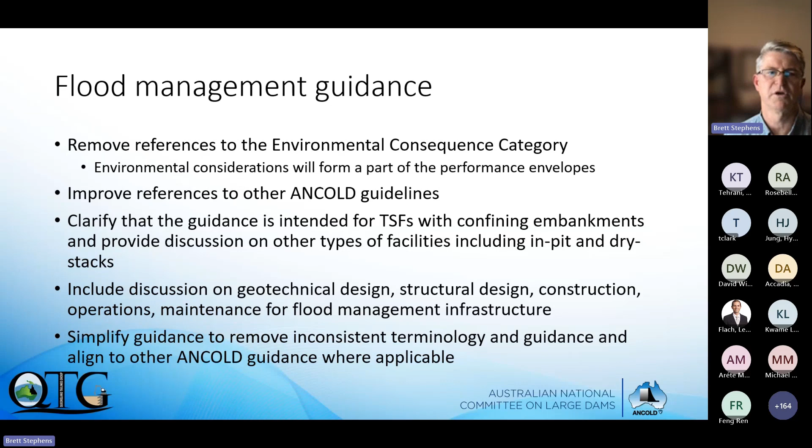We're going to clarify the guidance intended for TSFs, with confining embankments and other facilities, in-pit and dry stacks, probably outside our guidance, but can be applied with judgment and due diligence. We'll include a discussion on geotechnical design, structural design, construction, maintenance, and flood management, and look at simplifying the guidance to align.

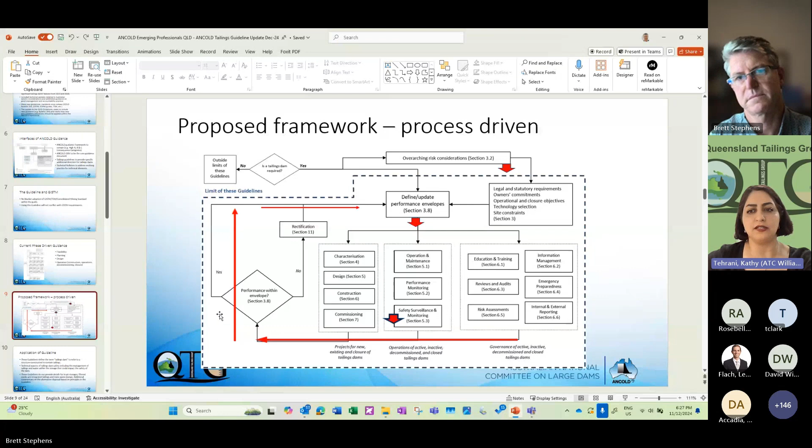Thank you so much, Brett, for your presentation and response. We have two more questions for David, if he's available. Sure, David? Yeah, let me just find the question.

Based on past experience, have any monitoring methods, in situ or remote, been useful for predicting failure location and onset times? Well, I sort of covered that in a previous question and answer.

Brett made the point that if we build robust, relatively simple, stable dams, the need for and reliance on instrumentation drops anyway. So that's a good point to make. But if you do want the added security of having some instrumentation, there's a range of different things you can use. Typically, we should aim for some redundancy.

I had a discussion just today. People were talking about vibrating wire piezometers, and they're a bit concerned that is that the only thing you should do? I think there's a consensus that you should not rely on just a single measure. It would be worth having a number of standpipe piezometers that you can use to check when you've got unusual or anomalous results from your vibrating wire piezometers, because they do break down. They do give anomalous results at times.

So it's worth having another way of checking. It's the same with everything else we do. There's no silver bullet test for testing the undrained strength of tailings. So you should do a range of different techniques and compare and contrast the results you get, and that will add to your certainty about the parameters that you select. So that's a roundabout answer, but it's horses for courses. Build stable dams first, and then the need for all the rest diminishes.